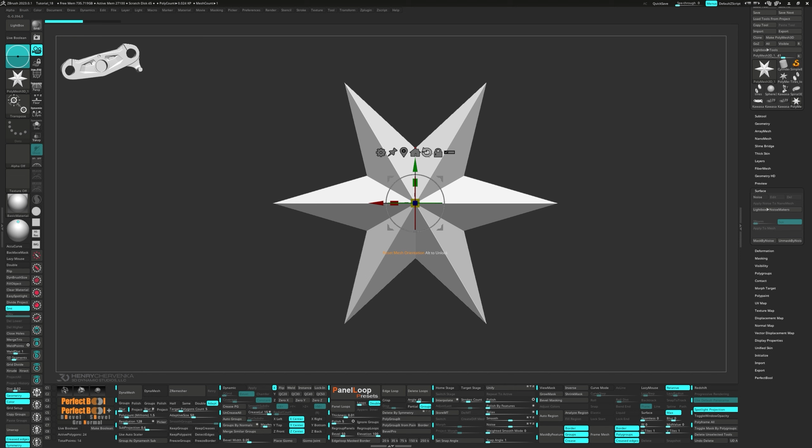Bring up the gizmo, head to the gear and pick the polycube. Press delete loops and weld it across the x-axis. Now let's make sure symmetry is turned on in the x-axis. Unmask the polygon and move it into place.

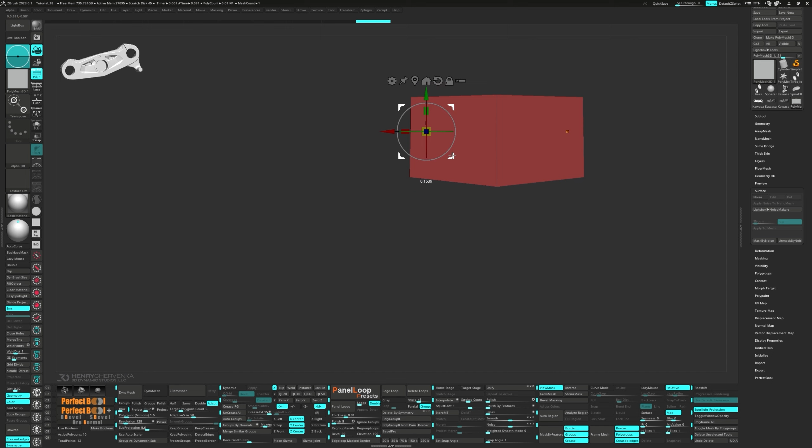Now mask the model and bring in a cylinder 3D. We're going to delete the other half of the model. Unmask that cylinder and scale it down a bit.

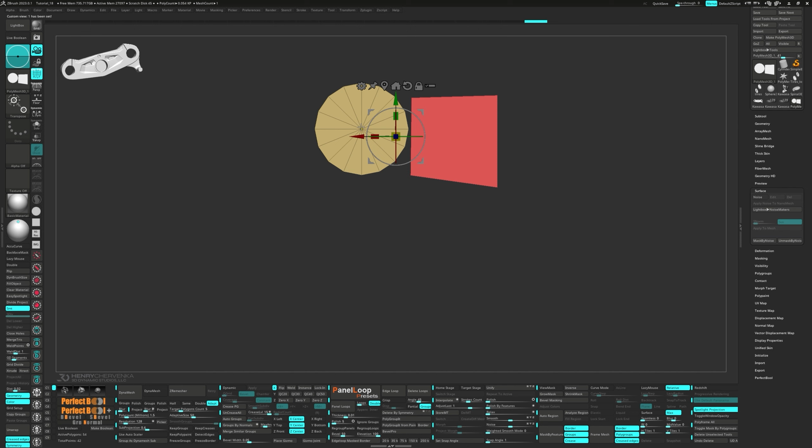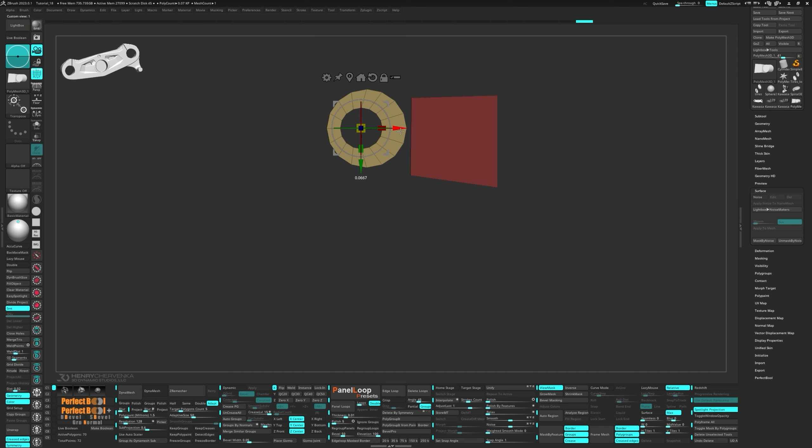Let's go ahead and inset the flat island and click to repeat on the bottom. Now we can Q-mesh the polygroup island. Unmask those inner polygons and move them closer to the edge. Grab the Move Infinite Depth brush and make any adjustments you need to get the shape just right.

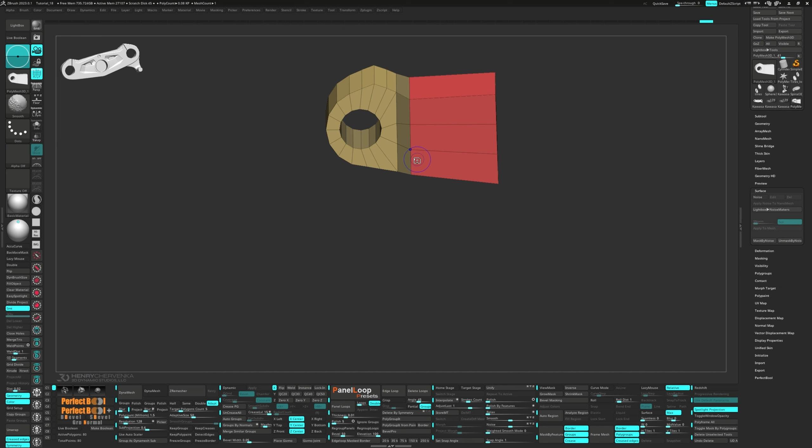Add a couple of edge loops and Q-mesh the flat island. Now we can press Ctrl W to group visible. Unmask the top and scale it flat. Go ahead and invert the mask and do the same on the bottom. Clear the mask and scale it along the Z-axis.

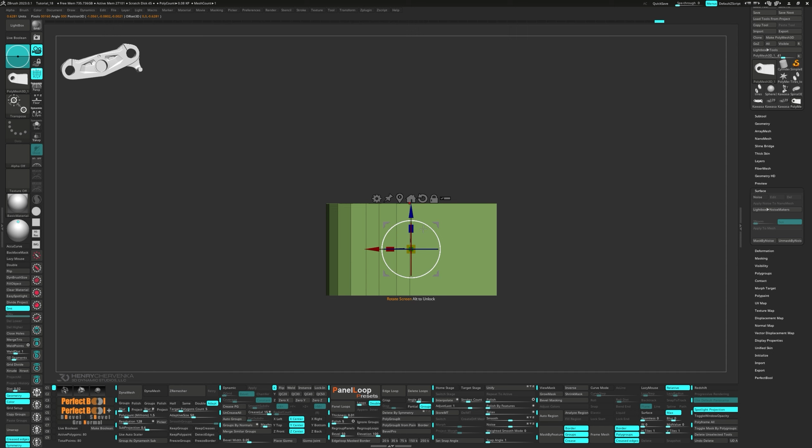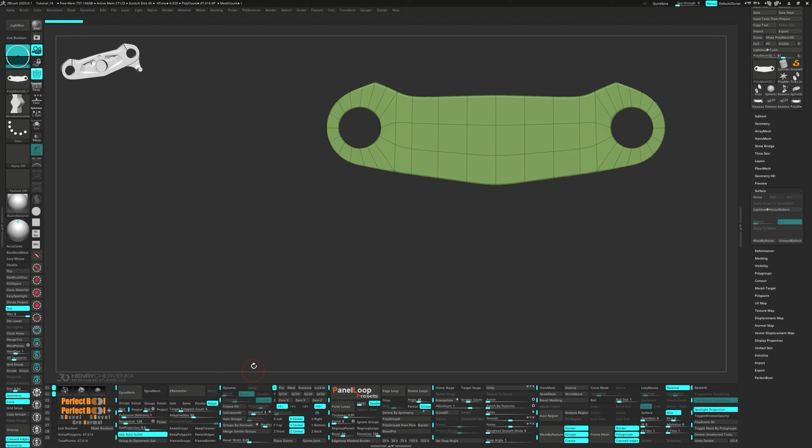Weld it in the X-axis and press QC50. Now we can throw in a couple of edge loops, crease the edge, and set the crease level to 3. Let's press Apply and delete the lower subdivisions. Set the poly count to 1,000,000 for the Dynamesh utility.

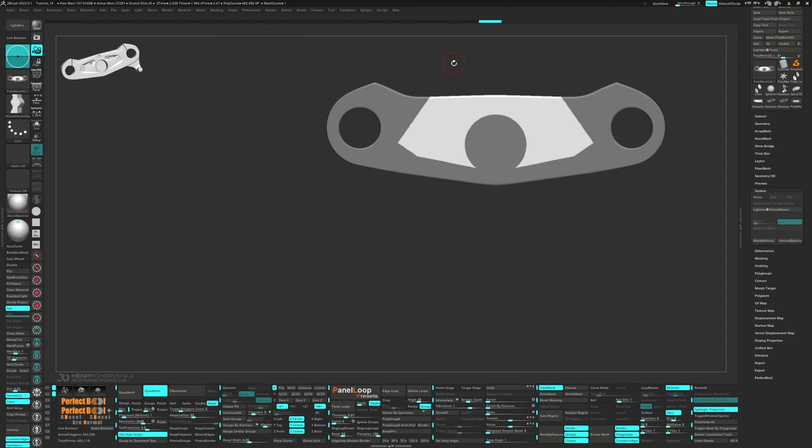Now it's time to grab the Mask Perfect Circle. Let's finish masking using the Mask Curve brush. Flip the mask, then press Ctrl W to polygroup that masked area.

Mask the polygroup and give that mask a little blur. Run a quick Polish by Features to smooth it out. Control-click on the polygroup with the gizmo to reset the mask. Then Control-move with the gizmo to extrude.

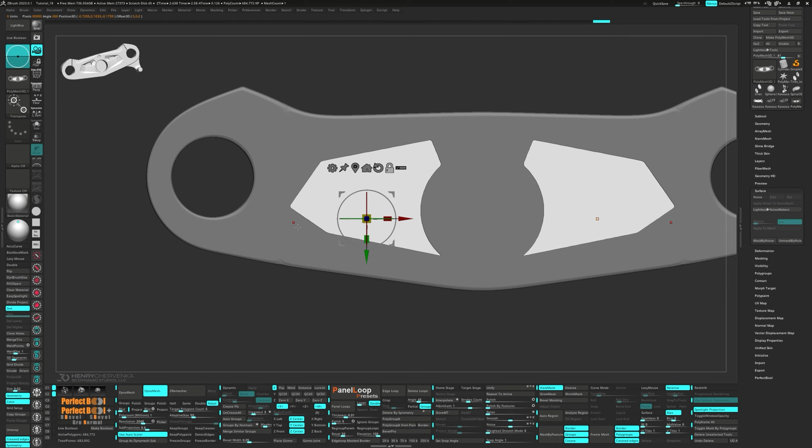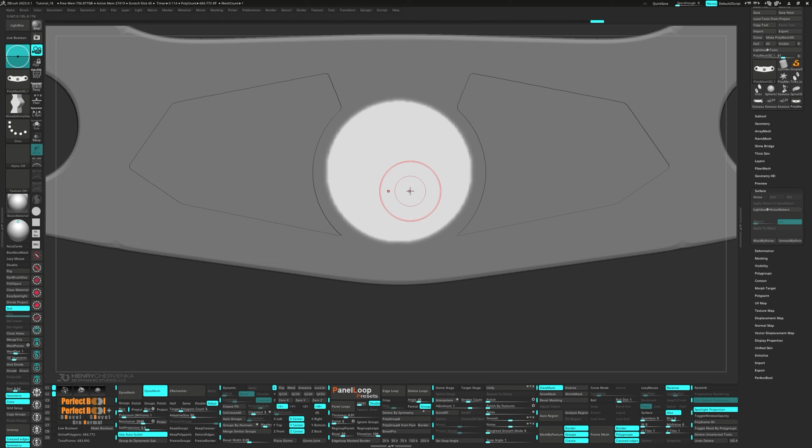Clear that mask and let's pick up the Mask Perfect Circle again. Press Ctrl W to polygroup the mask, then mask the polygroup and blur that mask. Let's run another Polish by Features to clean it up. Once again, Control-click on the polygroup with the gizmo to reset the mask. Then Control-move with the gizmo to extrude.

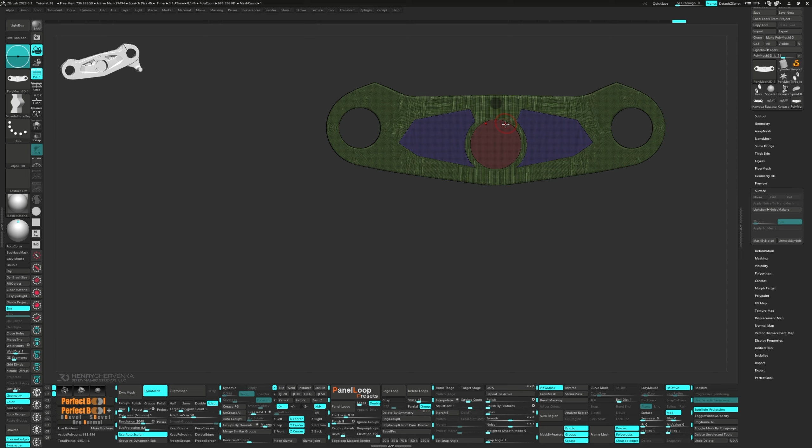Clear that mask and lay down another mask with the Mask Perfect Circle. Press Ctrl W to polygroup the mask. Mask the polygroup and blur the mask. Now we can run a Polish by Features. Control-click on the polygroup with the gizmo to reset the mask, then Control-move with the gizmo to extrude. This time, let's use the Clip Curve brush to clean up the back.

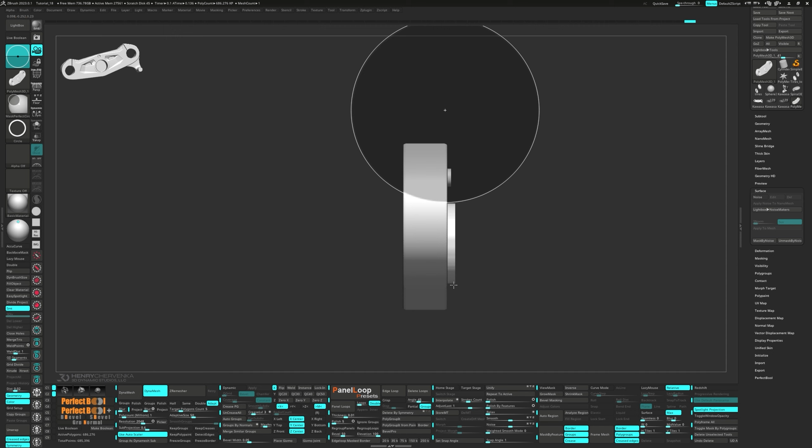Let's mask the model and bring up the gizmo. From the gear, select the Cylinder3D. Let's scale and position it into place.

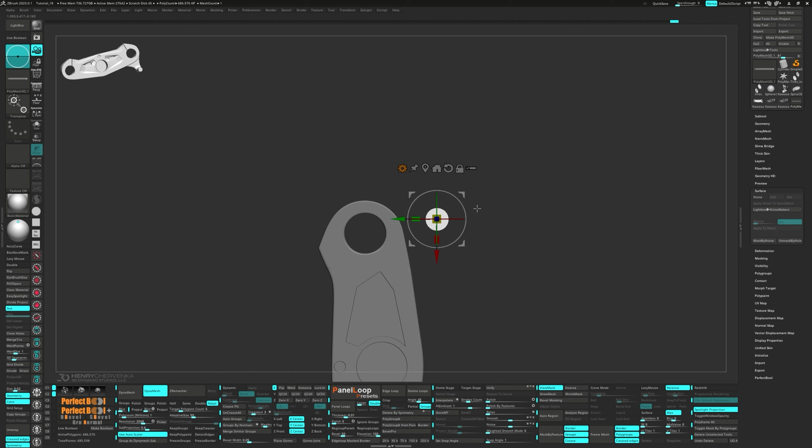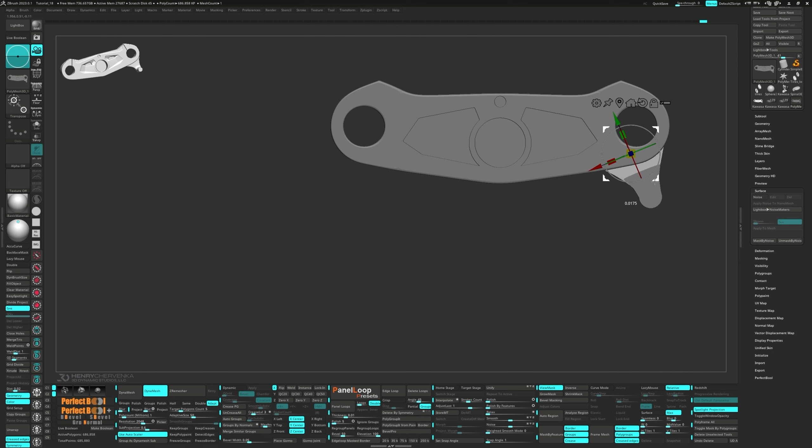Mask the polygons and extrude them with the gizmo. Let's scale them flat and extrude them a few more times with the gizmo. Grab the Move Infinite Depth brush to adjust the shape.

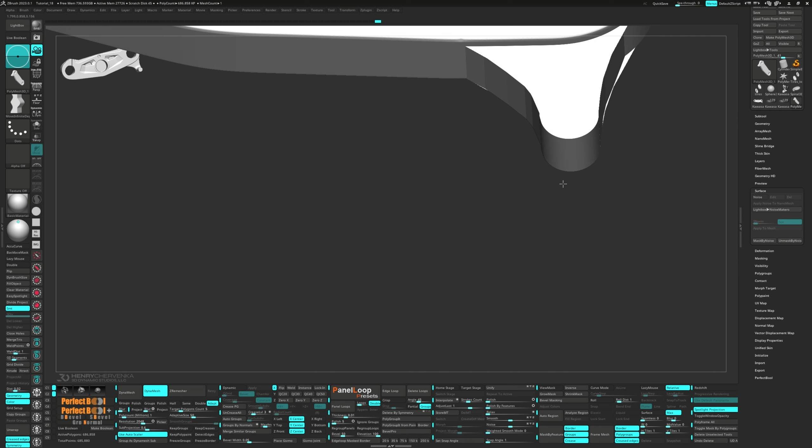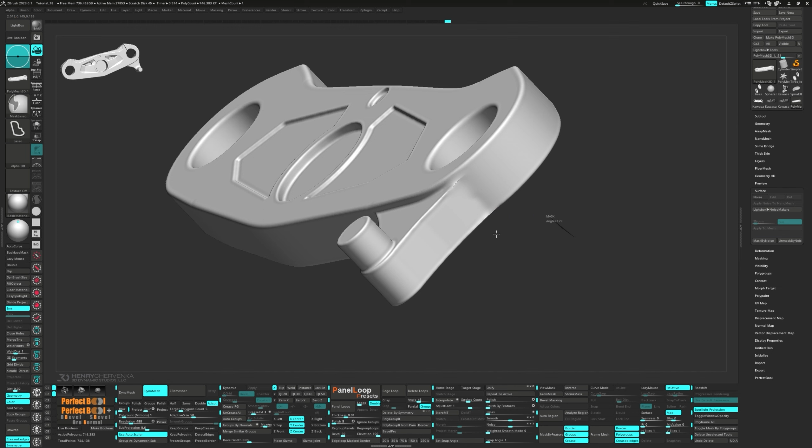Go ahead and mask the model, bring up the gizmo again, and from the gear, select Cylinder 3D. Adjust the scale and position. Then run a Dynamesh and polish. Let's smooth out any imperfections. Then use the Clip Curve brush to correct the curvature.

Let's grab the Smooth brush for some final cleanup.

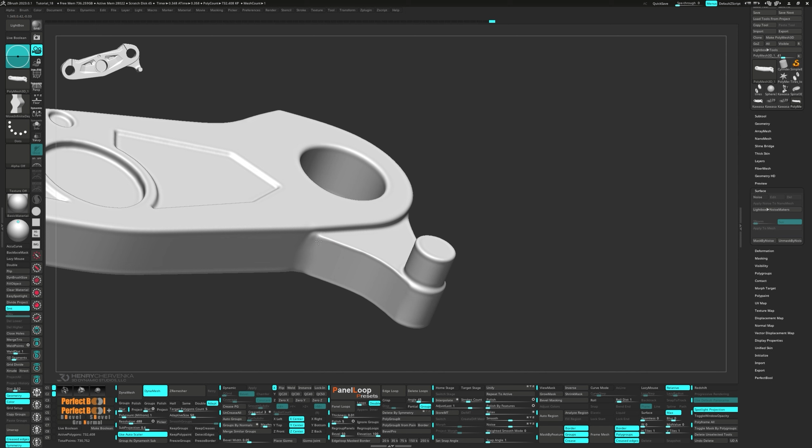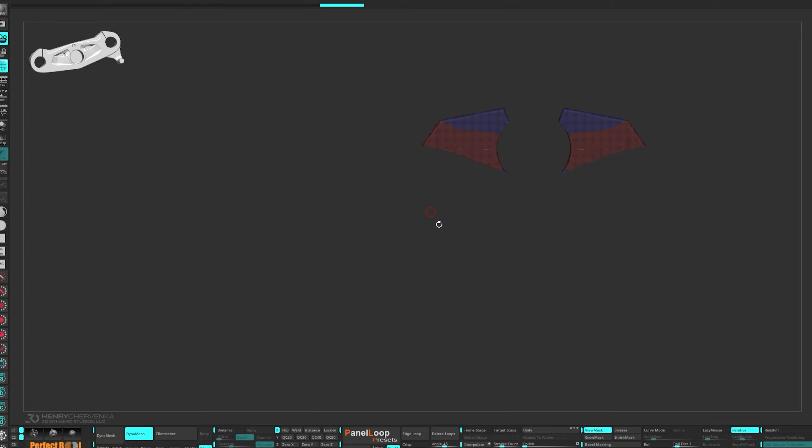Isolate the blue polygroup and grab the Mask Curve brush. Then press Ctrl W to create a polygroup from the mask. Bring everything back to view, and then isolate the blue polygroup again. Use the mask curve to make another mask, then press Ctrl W to polygroup that mask. Isolate the polygroup again and group the mask.

Let's polygroup our mask one more time for good measure. So we have a few extra polygroups. Pick out the blue polygroup and click on Auto Groups. Isolate these polygroups and press Ctrl W to group visible. Go ahead and select all the polygroups.

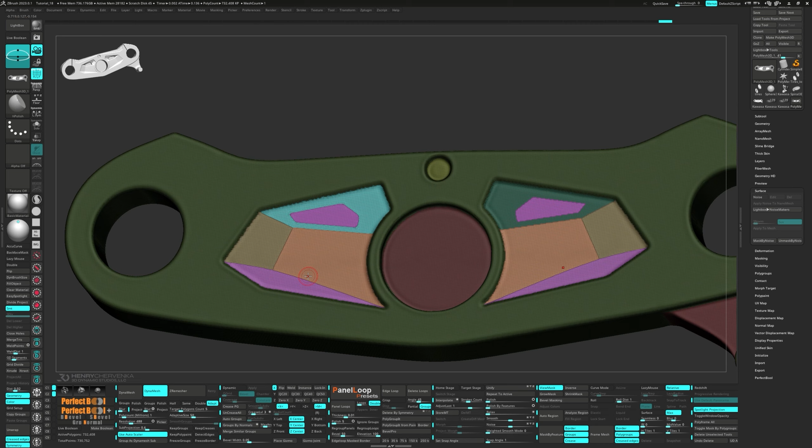I'll leave one group masked so you can see how important Polish by Features really is. Clear the mask. Isolate these polygroups to mask, then bring everything back and invert the mask. Hold Ctrl and move with the gizmo to extrude. Notice how the polygroup with a Polish by Feature leads to a clean extrusion, while the other polygroup is a bit of a mess.

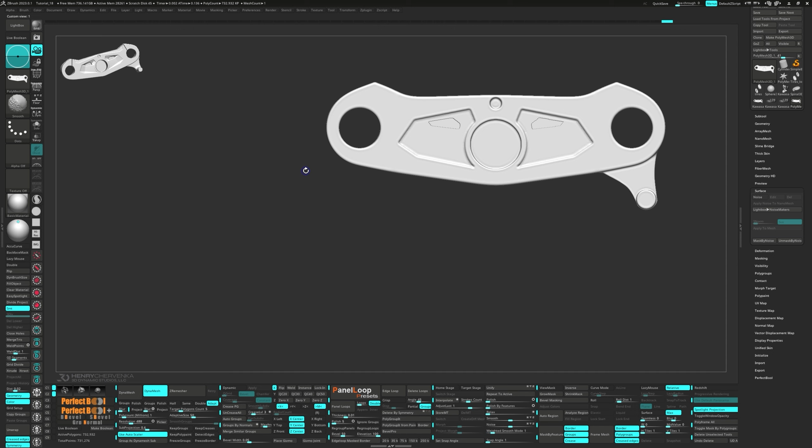For the interior of this piece, we'll model that when it's time to retopo. These polygroups will serve as a helpful guide when laying down the topology.

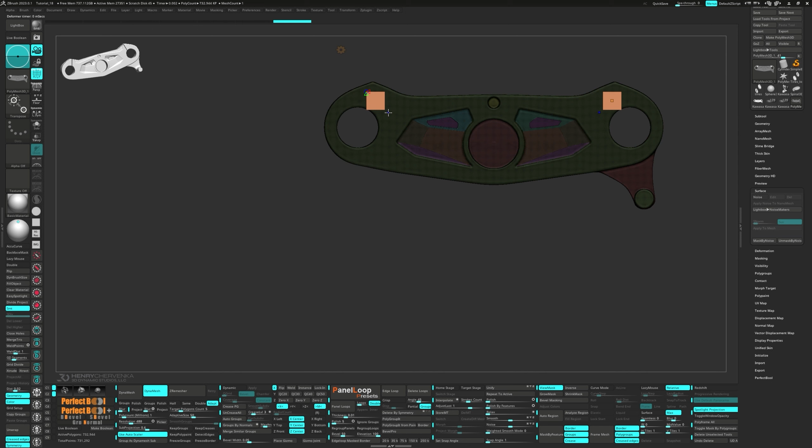Mask the model and turn on symmetry in the X-axis. Bring up the gizmo and select Polycube from the gear. Delete the edge loops. Then turn on local symmetry with dynamic switched off. Now we can scale and position the cube into place.

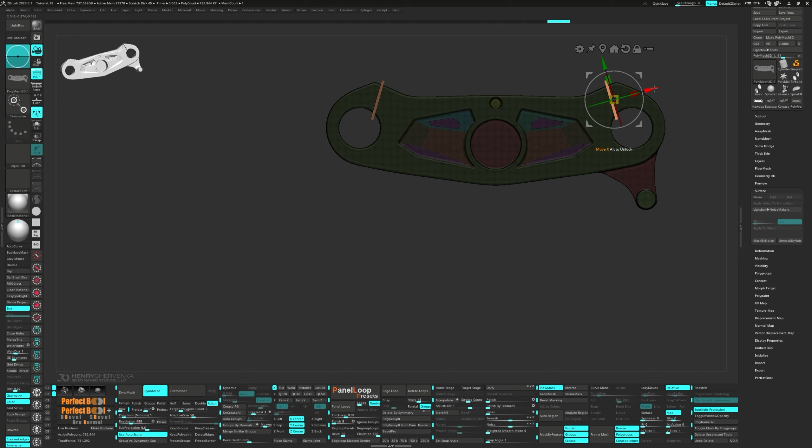Isolate the cube and press Group as Dynamesh Sub. Then we can Dynamesh and run a polish.

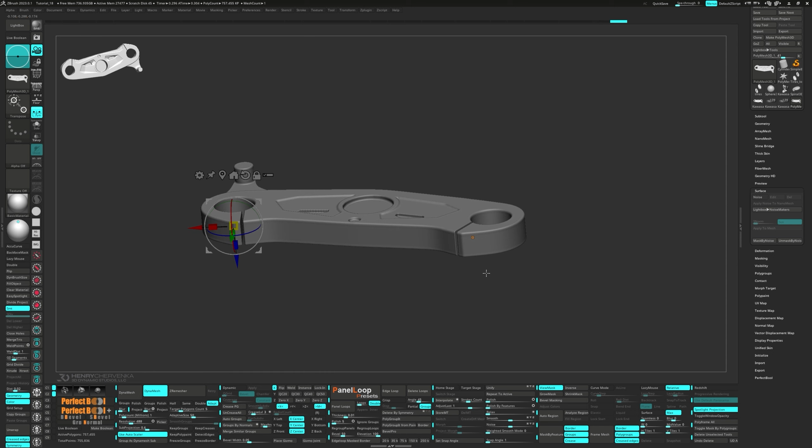Mask the model and turn on symmetry in the x-axis. Bring up the gizmo and choose Cylinder 3D from the gear. Let's scale and move it into place.

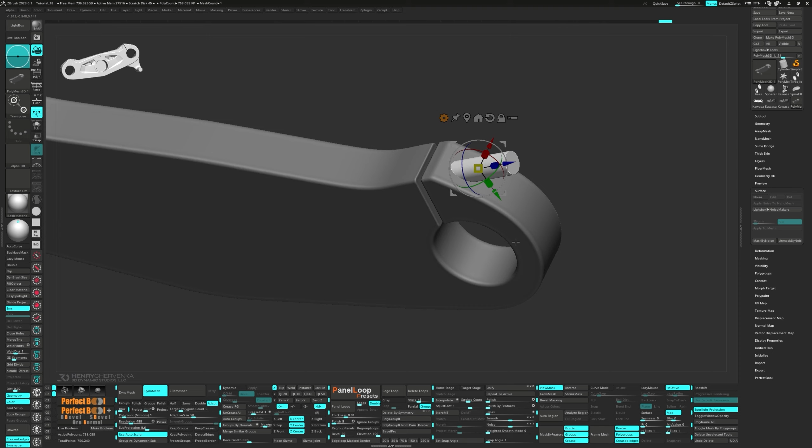Let's isolate the cylinder and press Group as Dynamesh Sub. Now we can Dynamesh it and give it a good polish.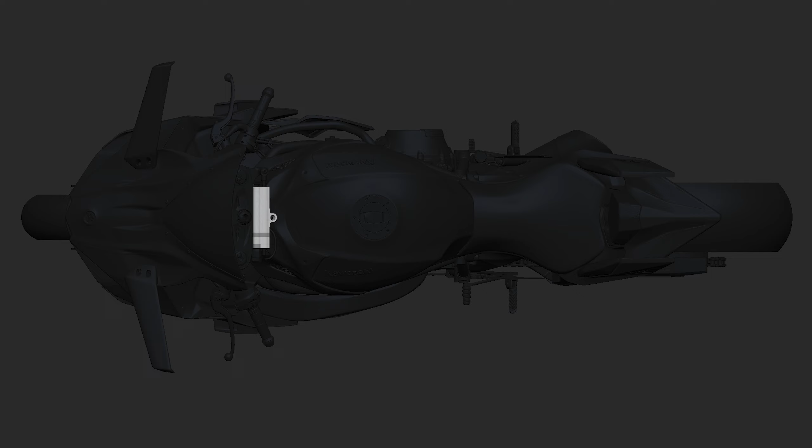Let's fire up the gizmo and choose Cylinder 3D from the gear. Set the H divides to 16 and press QC50. Go ahead and scale it a bit on the Z axis.

Hold Control and move with the gizmo to duplicate. Let's scale it down and clear the mask.

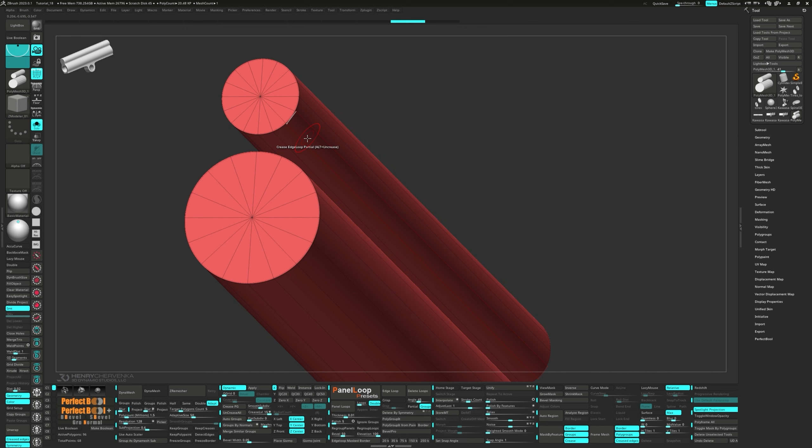Now we can Q-mesh the polys down. Press QC50. Unmask the top cylinder and move it down.

Unmask those two edges and collapse both sides. Time to add an edge loop right down the middle. Then choose Transpose Edge Loop Complete.

Clear the mask and press QC50. Then crease the middle edge loop.

Now, Alt tag the bottom 4 polygons to transpose. Control and move with the gizmo to extrude. Next, we want to scale them along the Y-axis.

Press Ctrl and W to group visible, then choose Inset Polyloop.

We can click to repeat for the back. Then we can choose Q-Mesh Polygroup Island. Now let's press QC50.

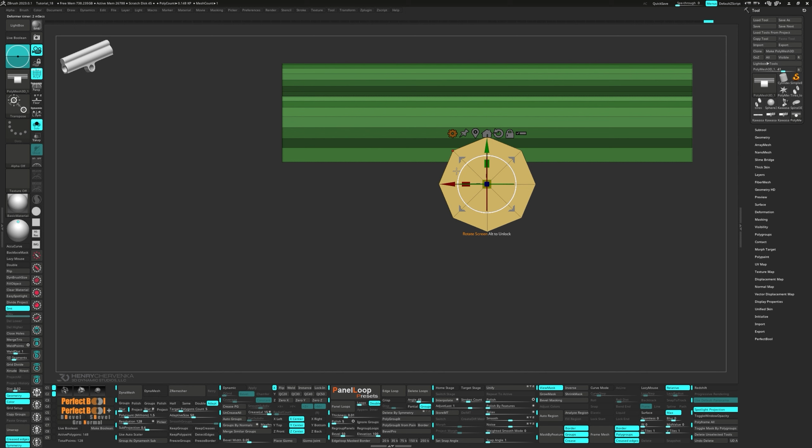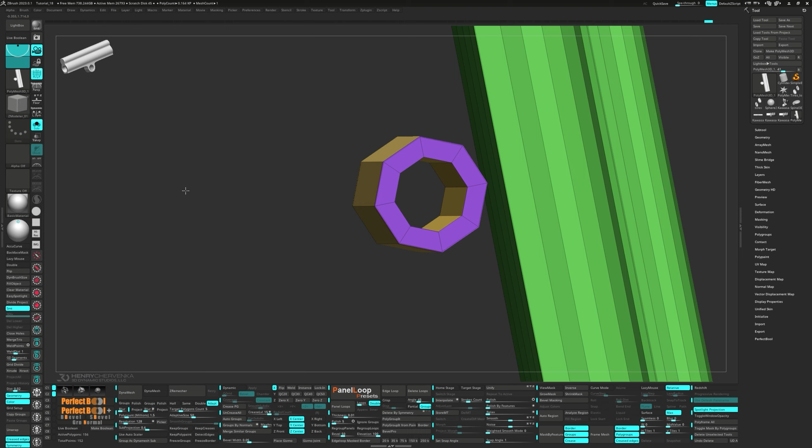From the ZModeler, choose Inset Flat Island. Then we can Q-mesh the Polygroup Island. Unmask the cylinder and clip the top faces.

Go ahead and add 3 edge loops on the outside and inside.

Unmask the cylinder and move it closer. Add in an edge loop in the middle. Turn on symmetry in the Z-axis and insert 2 edge loops.

Now we can delete those polygons. Unmask the cylinder and move it closer.

Go ahead and press weld points and turn on dynamic to see which points didn't get welded. Now we can increase the weld distance until the points get welded.

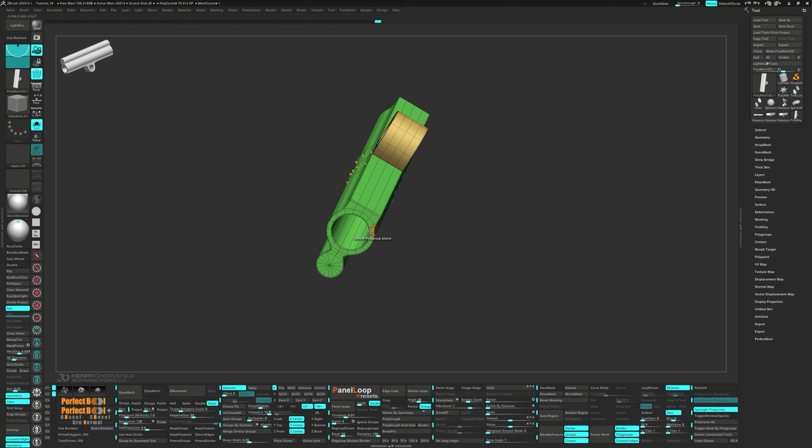Add in a few edge loops with insert multiple edge loops. Uncrease some of the edges and set the crease level to 3.

Now we can press Ctrl W to group visible.

Turn on symmetry, then unmask the edge loop. Now we can bring up the gizmo and move them out.

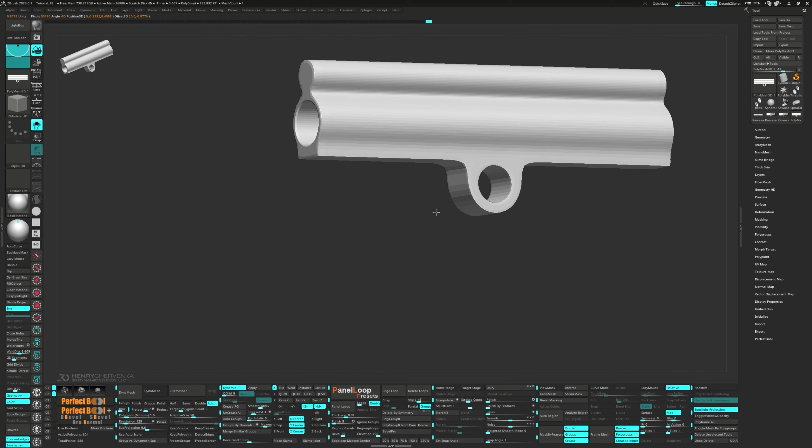Go ahead and duplicate the subtool. Press apply and set the subdivision level to 2. Delete the lower and higher subdivisions.

Select those 2 poly loops and delete hidden. Turn off smooth and up the subdivision level by 1. Now we can delete the lower subdivisions.

Go ahead and delete those 3 edge loops. Let's run a polish by features.

Then we can select Polygroup Flat Island. Set the adaptive size to 0 and turn double on.

Let's turn on Keep Groups and set the slider to 0 for the ZRemesher. This way we get evenly spaced polys.

Now we can delete the edge loops. Subdivide once and delete the lower subdivisions. Let's run a polish by features and delete the middle edge loop.

Press Ctrl W to group visible. Let's Q-mesh all those polygons outwards.

Let's choose Polygroup for the polygon action, Polyloop and Checker for the target. Now we can slide the edges a bit.

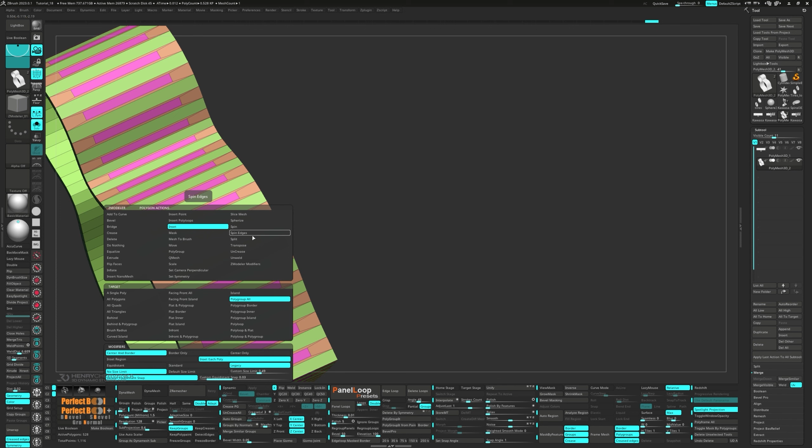We can tap Alt to change the polygroup color. Choose Transpose Polygroup All and scale it along the Z-axis.

Now go ahead and Q-mesh Polygroup All. Again, we'll want to transpose Polygroup All and scale it along the Z-axis.

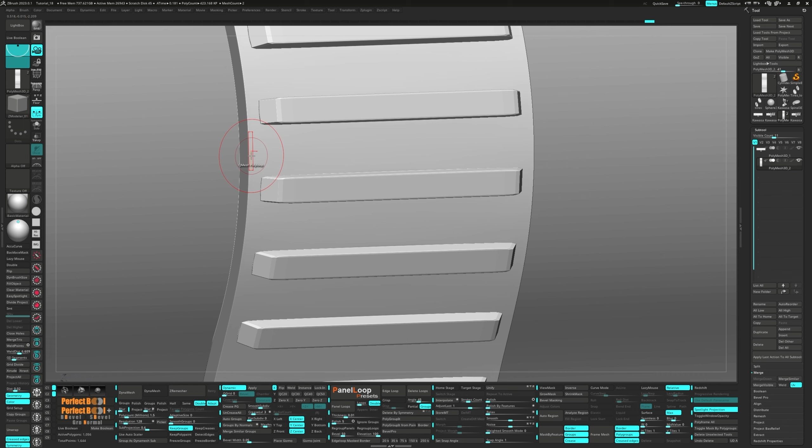Then we can QMesh the polyloop on both sides. Let's scale everything in the Z-axis. Now we can choose Slide Edge Loop Complete.

Press Ctrl W to group visible. Then add in edge loops to quad it up. And finally uncrease them.